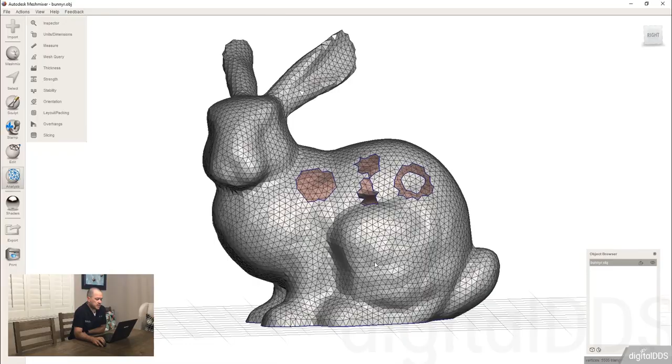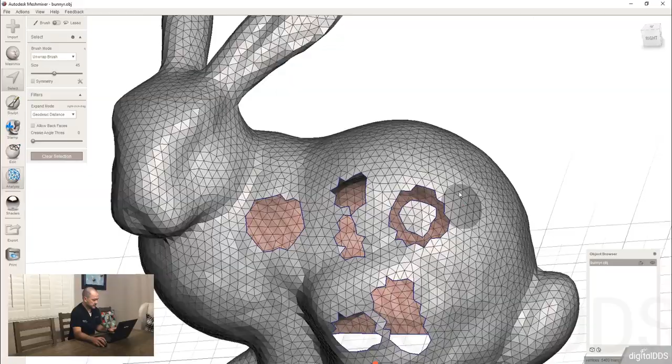The inspector tool is going to be mostly the tool you'll think of as the hole closing tool. There are some things I want to make you aware of. I've made a couple holes on here. If you notice right here, this one's just a normal looking hole. These are two holes side by side with a very small gap in between, and I think if we did a similar one and left a little bridge like that in between, we'll get the same result, but don't quote me on that. Notice on this one we've got this little island, and I'm also going to make a messy spot like this and delete that. I believe you're going to see a similar thing between those two.

Let's go ahead and run the inspector and let's see what we get. Let's go back into the analysis tool and run the inspector. As I was expecting, we were going to get the regular hole to be blue.

The red one, you can see that when there's this small bridge in between, it typically will outline it in red. Then you have this magenta, and this one also is in magenta. So the way I understand these colors is that blue is going to be your most predictable, where it's just going to close the hole. The red is going to close the hole, but it's first going to delete the triangles that are red. And the magenta is just going to delete them and not fill a hole.

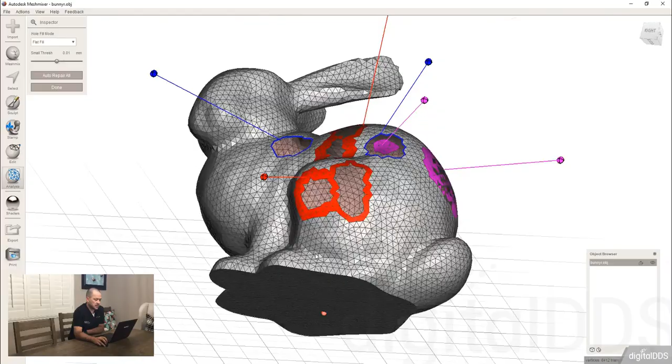So let's go ahead and look at some of these, starting with the easy ones. There's this blue one, it closes the hole. The other thing I want to mention is the hole fill type. The flat fill is going to fill it flat, just like it did down here. When I'm on a curve like this, I can fill it flat, but I can also switch it to smooth fill. These are just like the options we looked at when we were in the erase and fill tool. Minimal fill, we'll do these in a different variety.

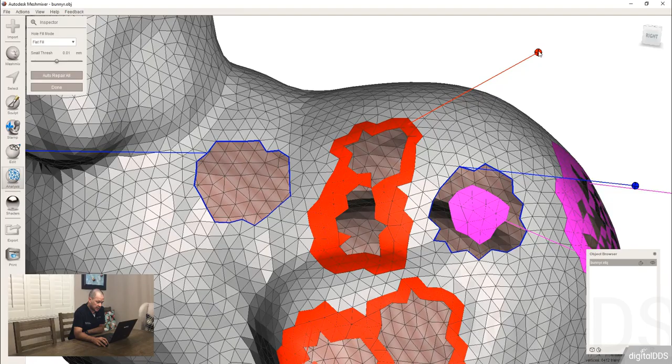Let's first click on one of these red ones and one of the magenta ones. Notice when I click on this, it's going to delete all of these ones that are red, and it's going to fill it in behind, just like it would if it were blue, but it deletes first, whereas in the blue one it doesn't delete any of these outer rings, it just fills in the hole. Let me stare at it closely, look at the ones highlighted in red, and notice that they did delete and that they're gone. Notice right here, if I click on that magenta one - I don't know why these are still red right here. Let's see if they're still red if we go back into the tool. Nope. So when I clicked on the magenta one, they just deleted.

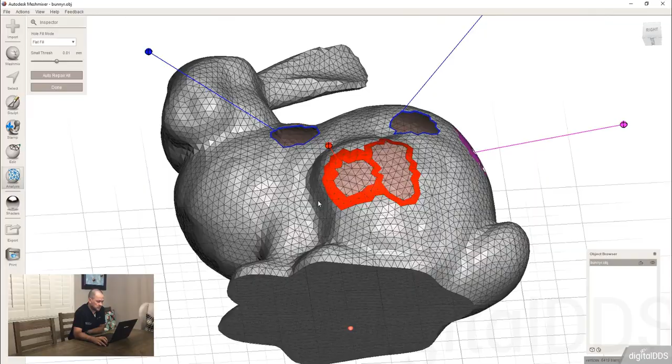Right here, I want to show you the difference between a flat fill, which is this one down here. Notice that the triangles down here are remeshed, like in the erase and fill - it was like a remeshed fill. That's what this one is. If you go to a minimal fill and click on it, see how it closes the hole, but it does it with as few triangles as possible. And on this one, we can say a smooth fill because it's kind of on a curve. Notice right here, it didn't fill it in flat. You would notice that more if it was something on a more notable curve.

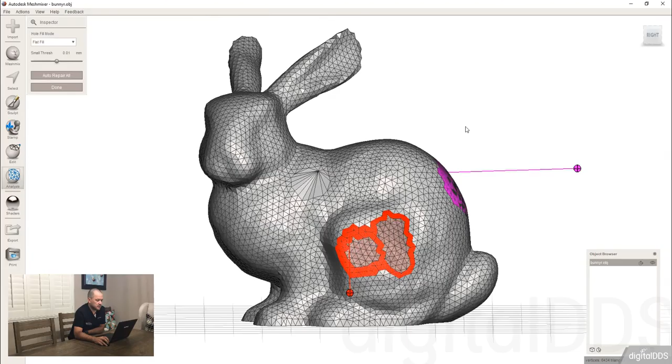So like, for example, when we are trying to change a screw axis hole on something designed in ExoCAD, and we're working on the surface of a tooth and deleting the old screw axis hole, we'll use a smooth fill in an area like that because we want it to try and follow the contours of the tooth. All right, I'm going to go back to the flat fill because that's the default. And on this one, remember that it's going to want to erase all of these and then fill it in.

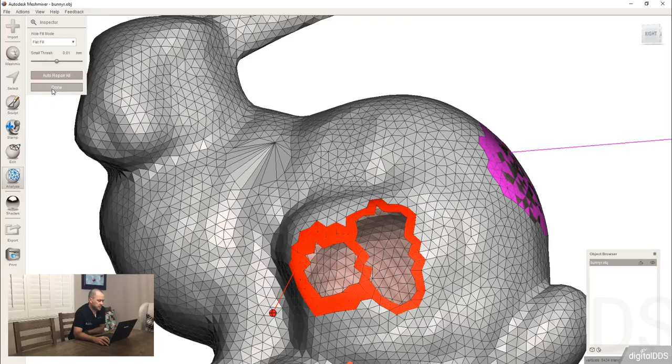Sometimes I've noticed that it does this because the bridge in between is something that the software does not handle well. Sometimes, if you go to the bridge in between, either one, you can go in with a smooth tool and try to smooth it into a broader band.

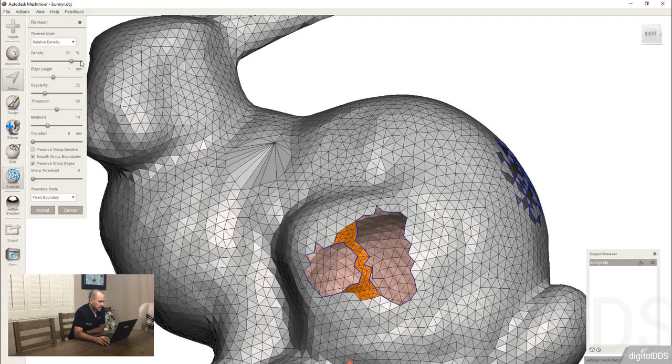I'm going to try to come in with a remesh and get smaller triangles, and then now that we have smaller triangles and the software has something more to work with... nah, it's still causing a problem. Let's try it again. Okay, just curiosity has the better of me right now.

And then analysis and then inspector. So see how once we gave it enough triangles in between to do what it needs to do. I don't know the exact calculations that it's going through to fill these holes, but obviously it was not happy with not having enough triangles in between.

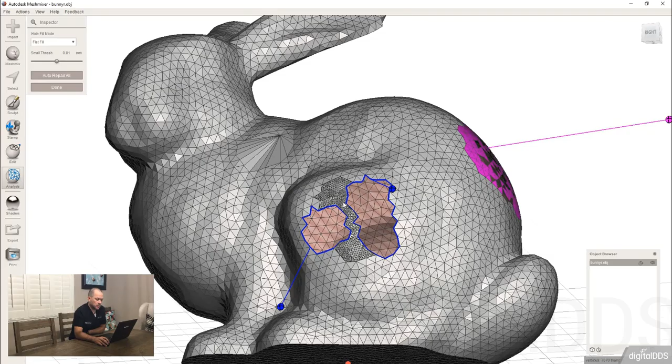So now we can go in and do that, and then at the end you could always go back in under sculpting and mess around with the actual triangle sizes to get something that's back to normal. Okay, and so that gives us that.

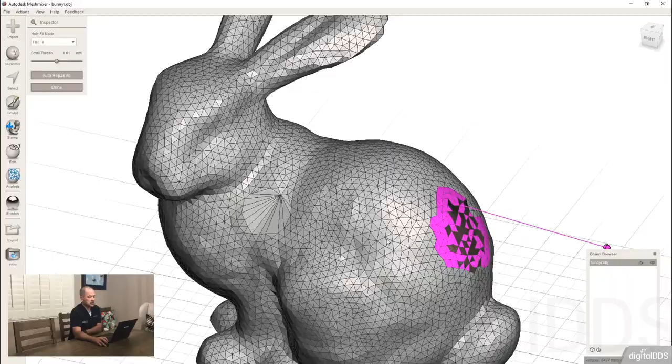The keyboard shortcut for the inspector tool is I. So if no other tools are selected and you hit I, it brings the inspector on. Notice right here, it's going to click on that and it leaves a hole.

The other thing I wanted to mention, I want to delete a couple of these holes again. When you go into escape, now when you go into this tool, there's also this small threshold one. I don't know if these are going to be enough, but the small threshold is basically giving the software a limit as to how small is okay.

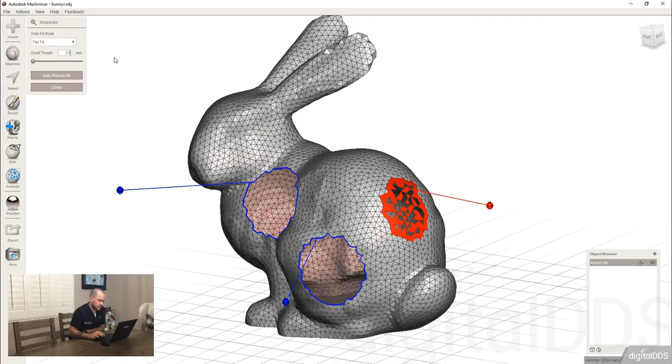And right now it's set at 0.01 millimeters. If you drag it all the way down, see how now it's saying that it's going to just delete these and fill them in. I don't know, I've never tried dragging it all the way up. I don't play around much with this, to be honest. The default on this one is just 0.01, but that's what it's for.

The other thing we didn't talk about is right here, this auto repair all. When you click on that, it fills everything in. Notice that on this one, it did fill it in.

Whereas if you do it this way, I can click here, I can click here, and I can click here, but this just deletes it, and I'd have to run the tool again to then go in and close it. But when I said auto repair all, it just fixed it all the way to completion instead of going in two steps. So that's something I wanted to explain to you.

You'll use that tool a lot, especially as you bring an intraoral scan in and you're trying to clean it up. Normally what I do is a combination of bridging, inspector, and smoothing to clean up the borders or something. Every now and then you might utilize something else, but those are the main things. We'll talk more about that later in the course, about cleaning up a scan.

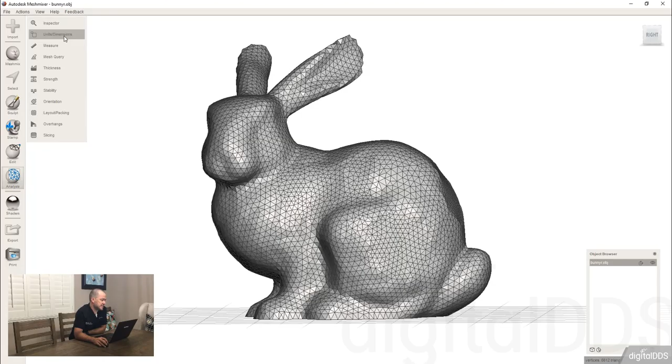So I'm going to go ahead and hit done. For the unit and dimensions one, if you click on that, what that does is it creates a box around the object. I think they call it a bounding box. Notice the bounding box is on the XYZ grid, so that's how it's positioned.

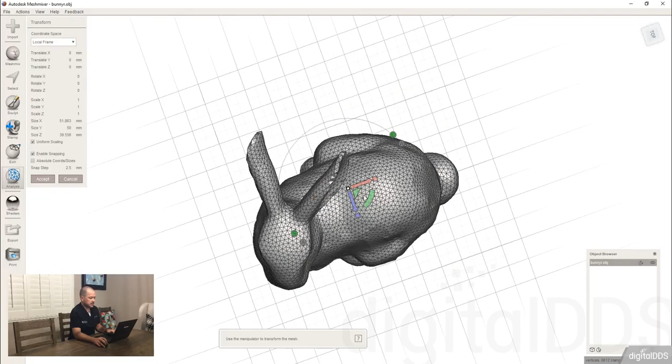So if you were to move your rabbit, let's go out of here, hit T on the keyboard, and I change it like this, and I hit accept, and I do units and dimensions. Notice that it still keeps this on the grid, and it gives you some measurements. Height-wise of this rabbit is 50 millimeters.

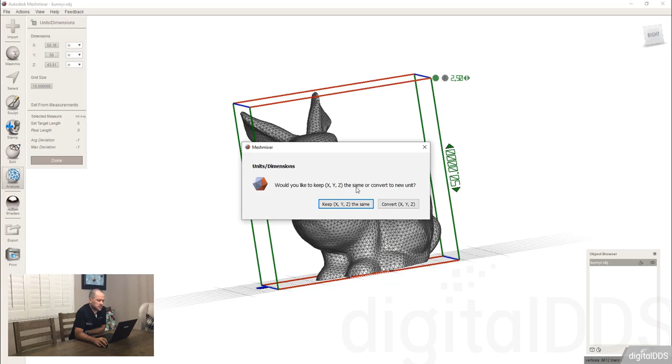You see, millimeters. If I want, let's say you bring something in and you want to scale it to a different size, but you don't want it in millimeters, you want it in inches. Right here it says, would you like to keep the XYZ the same or convert to the new unit? We'll say convert to the new unit, because now we can see that what used to be a 50 millimeter tall rabbit is now almost a 2-inch tall rabbit.

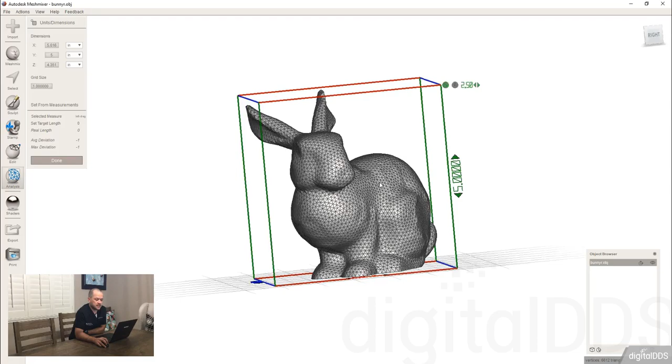And so if I know that I want that rabbit to be 5 inches tall, I can click that into here and it resizes it. So now my rabbit is 5 inches tall. If I want to print this right now, I'd be able to print it at 5 inches.

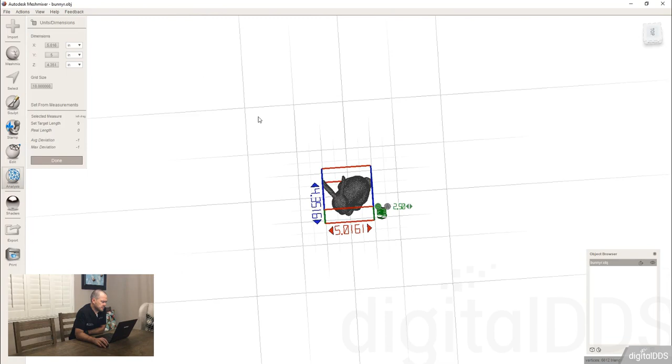Let's see, grid size, I notice, is just something that's telling you what this right here is, okay? And in this case, I'm wondering if when it's at 1, it's just a default, because if I notice what happens is if I go in and I put it at 10... I don't do this a lot, to be honest. Hold on, I've done it more in the millimeters.

All right, let's switch over to millimeters. So when I'm in millimeters and I put my grid at 10, notice that, and let's change this to something that's a little smaller. Let's go to 5 millimeters.

All right, so this switched my grid to 1. So you see this from here to here is 1. And if you look, it's 1, 2, 3, 4, like this outer one right here, 1, 2, 3, 4, and a little more than 5. Okay, so that gives you an idea on what the grid size can do.

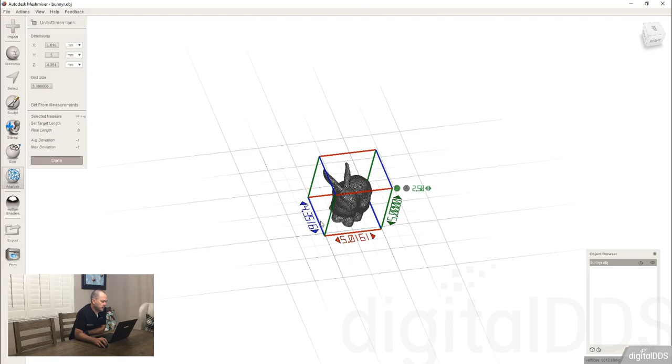If I switch that to 5, it looks like the outer grid, like way out here, this is 5, and then it breaks it into smaller increments. I don't really mess around much with that, but if you ever wanted to change your grid size, that's a way you can. One, change the entire size of your object, like scale it to a specific size - you can do that in scale, like in the transform tool as well. But you can change your grid size.

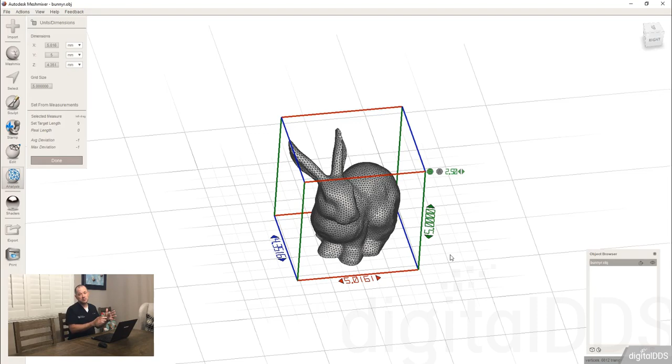But then this is the interesting one right here, okay? For this one, I'm going to use the example I saw, which I don't have to show you - somebody had taken a scan of a real object. It was actually the front of a doorway going inside a building. They scanned it in and brought it into here, but they had actual measurements that they took when they were scanning that in. What I'm going to do instead is show you this object right here, which is kind of hard to see.

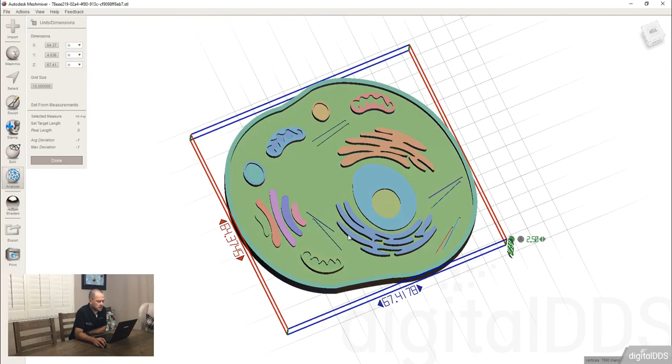So let me do this. Let me go into edit and get some face groups here just so we can see things a little better. All right, so then go back into the analysis, into this tool. Now notice, let's say that this is a cell that my son designed for his school project, and he designed it in Fusion 360.

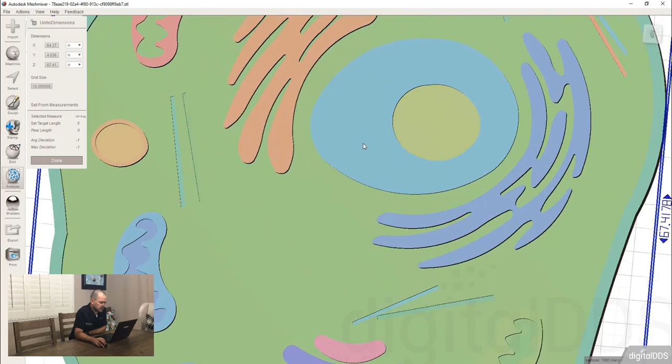But let's say he got this out, and we already looked at changing things by these right here. But let's say he knew, or there was a requirement for his assignment that the center of the cell had to be a certain dimension. You can click in one spot here, drag to another, and it creates this line. And then you can come in - that's the real length - but let's say he was supposed to make that 15, okay? So he can switch this to 15 and it resizes.

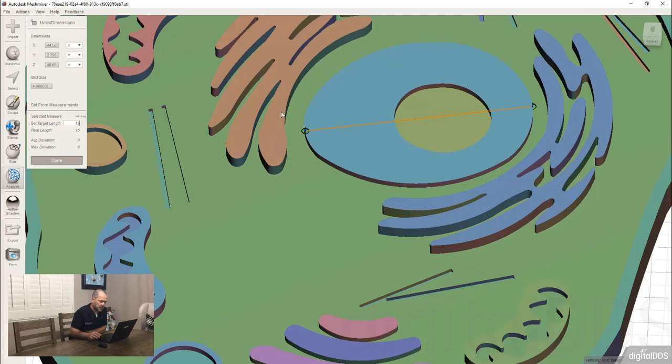See, now the real length is now 15. But let's say you had certain dimensions throughout, okay? And so you came over here and clicked on this one, and this one was supposed to be 8.5. And the more you do this - and this is not the best application for this, okay...

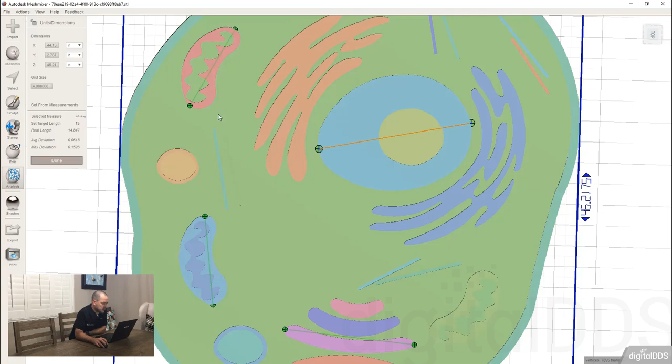Doing something in real life and bringing in the real measurements makes a lot more sense to me. But if I start going along, notice that when I'm going through and changing this - I don't know why this one's not hitting enter - but notice that as I've been adding more and more dimensions, it's telling me how far off I am from being able to make these all the same.

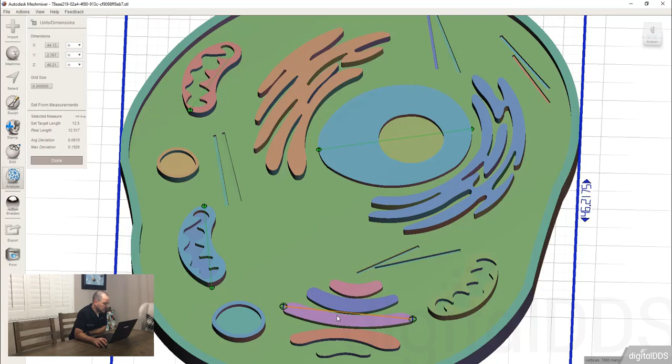And one of these, so notice that - the first one I changed to 15, but then it deviated away from that, okay? So it's trying to find a close enough deviation to size it properly. So it makes more sense if you're trying to scale something on the computer to something in the real world, like if you scanned it with something that didn't maintain dimensional accuracy - that would be a way of doing that.

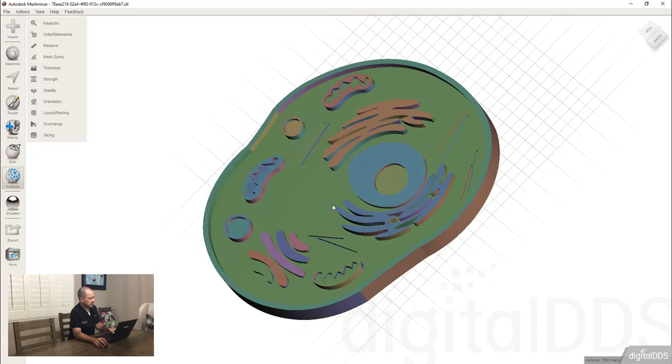All right, so I'm going to go back to our other scene, and I'm going to show you this last tool, which is the measure tool. Okay, and let's see here - so the measure tool allows you to choose a few different ways of measuring.

Okay, so this is telling you - like these top ones right here, you click on one spot and then it will measure to a different spot. This one here, you click on two spots and it'll measure between those two spots. And then this one right here, you click on one spot, it gives you the XYZ, and this one tries to create a cylinder around something and then gives you the radius. The direction shows when you're using these top ones, where you're just clicking in one spot and then it goes in a direction - that's this.

And then the snapping modes, I'll show you this one, but this allows you to snap to something, similar to some of the things we saw in the pivot tool, the drop or make pivot tool. I have some pre-selected areas here. If I click on this triangle, notice the line is perpendicular to that triangle, the normal, and it's measuring from my point through the object until it hits something on the other side. It started at my point and stopped right here, and this tells me the thickness at that spot. Notice there's a number above and below, and right now they're the same.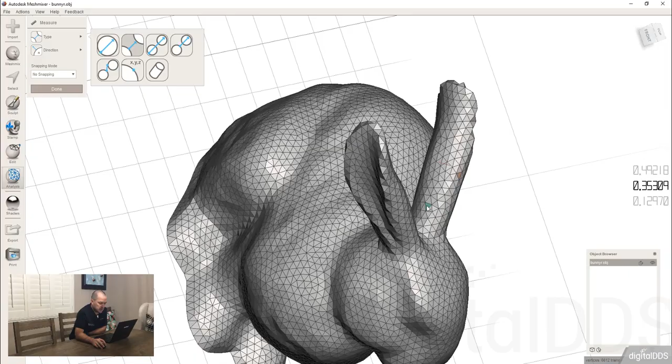This one here, notice, look at the picture, it's going to start where my click is and go the opposite direction, outside the object until it hits something on the other side. So I can click right here and see how it goes across until it hits here. Now if I'm out here and I click, nothing happens because there's nothing it's going to run into. The further out you get, you'll notice it starts not hitting. See how it keeps moving out, out, out, and sometimes the angle is such that it's just not going to connect. So it's measuring across that void.

Then if you go to this one here, notice it starts at an edge, goes inward, but keeps going until it hits the outer edge on the far side. If I click on this one, see how it is - that's not what I meant to do. This one's going this way and then it doesn't hit. This one though goes all the way down through the rabbit, all the way down to here. So it starts in one spot and goes all the way until it hits down in here.

And then this one does the opposite. If you remember on this one, we clicked here and it stopped right there. Well, if we wanted to measure all the way through to the other side, we can click this one, and now it's measuring through to the other side. All of these work the same way, where you can click and drag, but you've got to make sure it's within something. So that's those ones across the top.

And then the direction - we've been using the normal, which is perpendicular to the triangle. But if you want to know a different direction, I'm going to click right here on a curve. If it were the normal, this would shoot down at an angle because this triangle is angled. But see how it's going straight down instead?

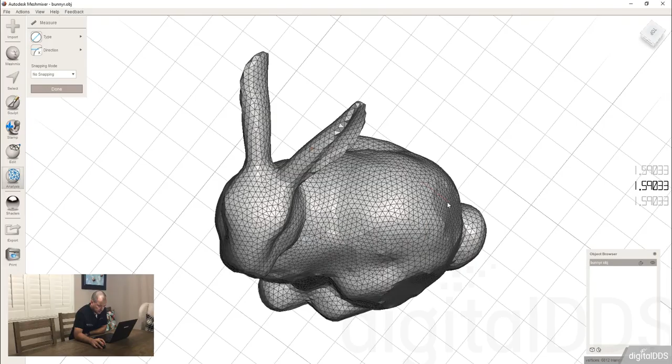So if my object, in this case my bunny rabbit, is sitting on the plane, then the Y direction tells me from that point down to the bottom how tall the object is. Whereas if I go with the X direction, notice it doesn't matter where I click - let me switch my bunny so we're in the right plane - it goes straight through until it hits something, but stays along that X axis, and you'll get a similar result if you switch to the Z axis. So if you want to measure something aligned well to the grid, that's a nice option you have.

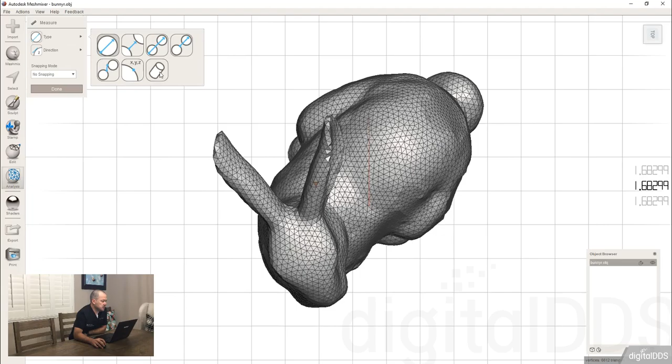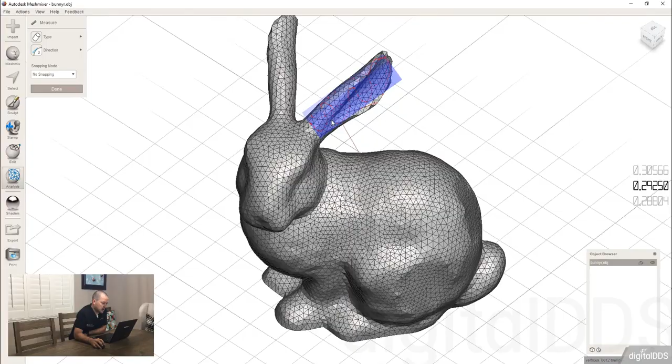So then we've got these ones down here. I'll end with this one. This one's interesting because you click and drag around, and notice that as I'm dragging, it's fitting this cylinder as best as it can onto a shape.

And what this gives me is the radius of that cylinder. When I was researching this, it was suggesting that instead of this tool, it would be more accurate to use your fit primitive tool to fit a cylinder, and then measure that cylinder. So I don't see myself using this tool much, but it does give you a way to measure the radius of a hole if you need to.

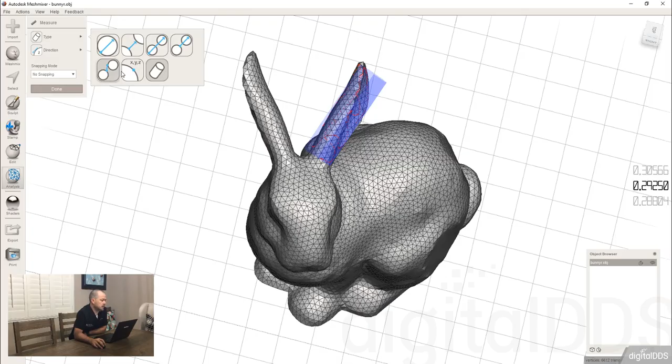This one here is pretty straightforward - wherever you click, it gives you an X, Y, and Z coordinate for that point.

This one, I think, is the most useful tool, because I can click two different points. You left click the first point, then hold down shift and left click to get the second point. So if you have two points you want to measure between, you just do that. Notice the one I left click stays in place - so I'll left click right here, then left click here. Notice that stays, whereas if I left click here and hold down shift, this one stays. So they get anchored off of whichever was the left click versus the shift left click.

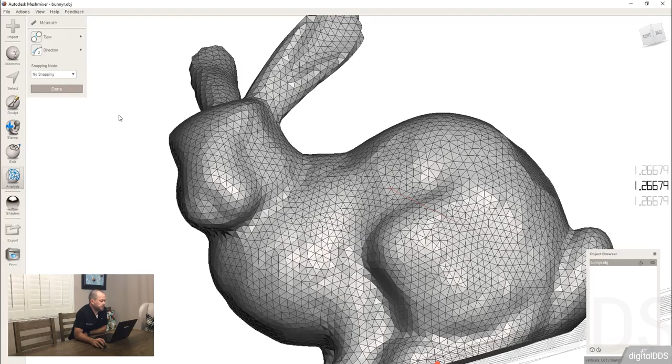And then I want to show you the snapping modes. There's not a lot to choose from, but if you snap to vertices, you can click right here and see how even though I'm clicking anywhere around, it snaps to one of the vertices. Then I can hold down shift and click over here and it does the same.

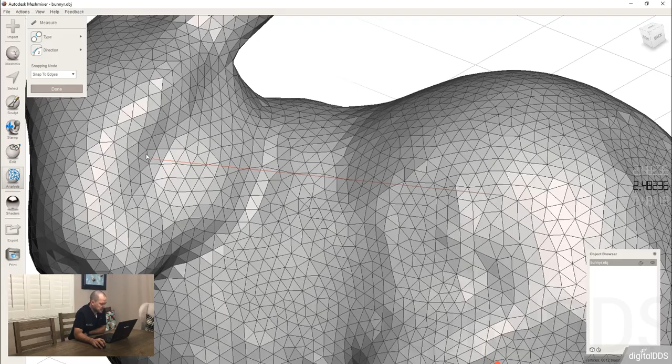You can also snap to an edge. With edges, you just have to be close to one and see how it snaps along that edge. This one stayed snapped to the vertices, but you can do it to an edge. And then you can also snap to a group border - this, for example, is a group border.

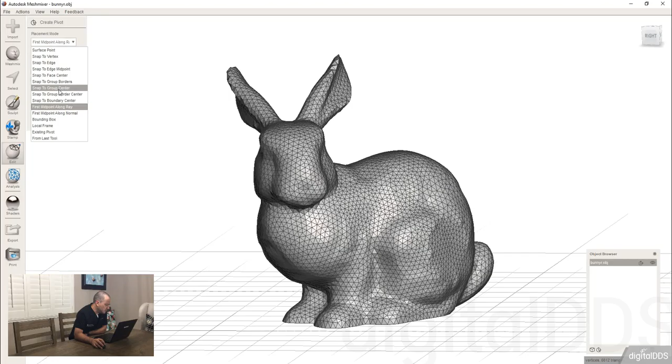The other thing I found when researching this is that it can also snap to pivots. So if we were in edit mode and went into create pivot, we could do something like this, and notice how many options there are for placing a pivot. It already had this one, this one, and this one, but let's say we wanted to snap to the boundary center - click on it, drop the pivot, and I'm guessing that pivot's sitting right in the center.

Let's do this - I want to get rid of this bunny and see an open bunny, so I can see inside there. Then let's go back to create pivot and snap to - oh, not boundary center, sorry, I meant bounding box. That puts it right in the center, and we'll drop the pivot. Boundary center needed a boundary, and the other one we had did not have a boundary, so this gives us one that's right there in the center.

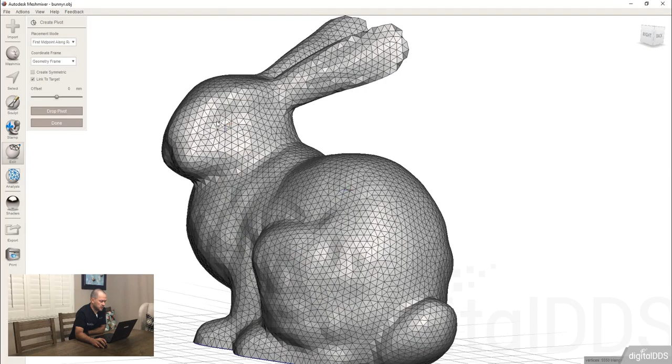Let's also do a midpoint along a ray. If you remember from before, if I click right here, viewing a ray going perpendicular to my screen, it's going to go right through to the other side of the bunny, but it takes the midpoint. So this is a midpoint between my - oh, did I double click on that one? All right, we'll just use the first one I did. So we hit done.

So we've got these two points that we wouldn't have been able to use the measurement tool on otherwise. We can come back into analysis, into measure, and we have our two points - you don't even have to have snapping on, it'll automatically snap to those points and give us a distance between them. So if you know where you want to measure between, that gives you an option to make a very precise measurement between two different spots.